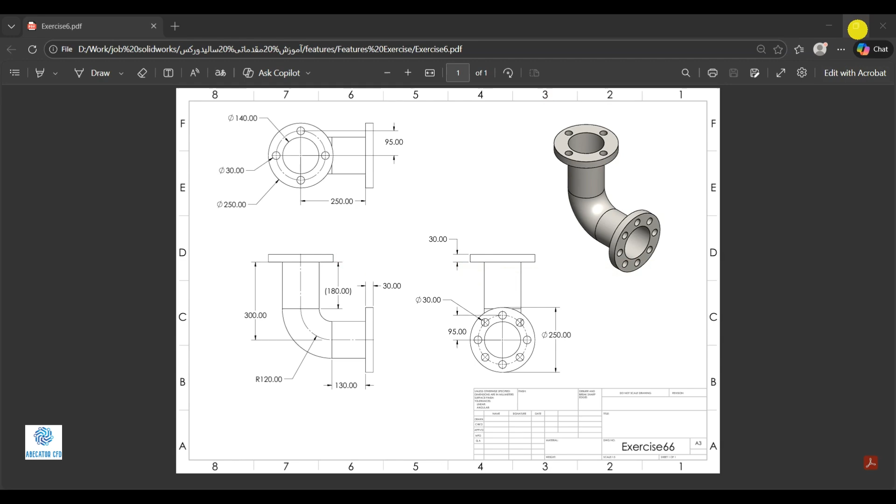We will build it using Swept Boss/Base with a circular profile. Let's get started. On the front plane, we create the sweep path sketch. Start a sketch and use lines and arcs to draw this path shape.

Draw the first line here and set its length to 130 millimeters. Now add a tangent arc, and set the arc radius to 120 millimeters.

The tangent arc tool automatically makes the arc tangent to the previous line. Now draw the next line and make it tangent to the arc. Set this line length to 180 millimeters.

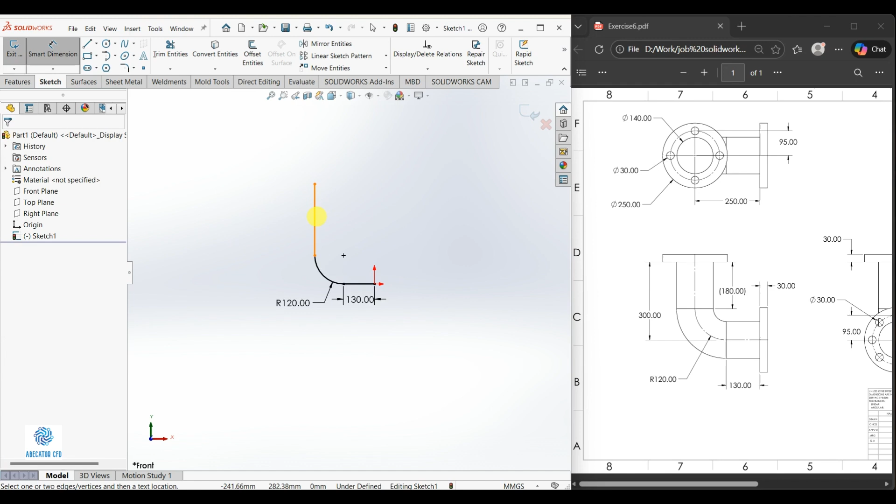Now select Swept Boss/Base, and use Circular Profile for the sweep. The pipe diameter is 140 millimeters, based on the drawing. Enter 140 millimeters for the profile diameter.

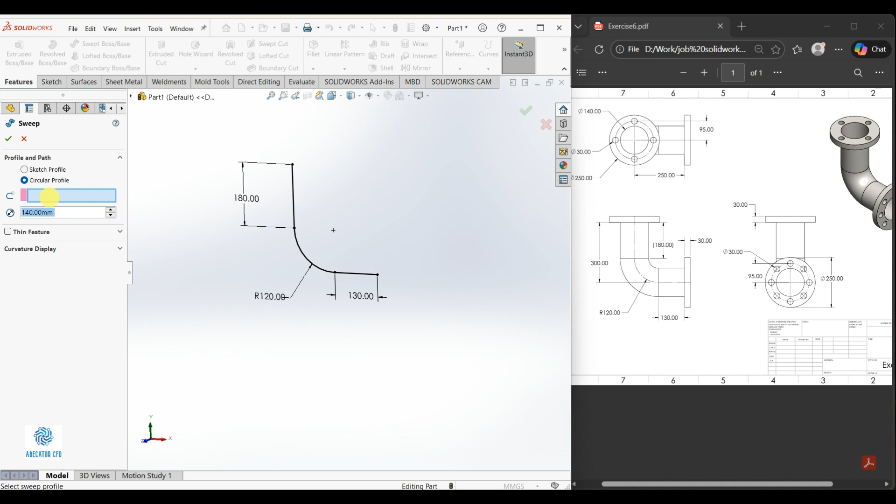Select the path, enable Thin Feature, and set the wall thickness to 1 millimeter. Click OK. The elbow is created successfully.

As you can see, it is a completely hollow elbow. If we use a section view, you can confirm the inside is hollow.

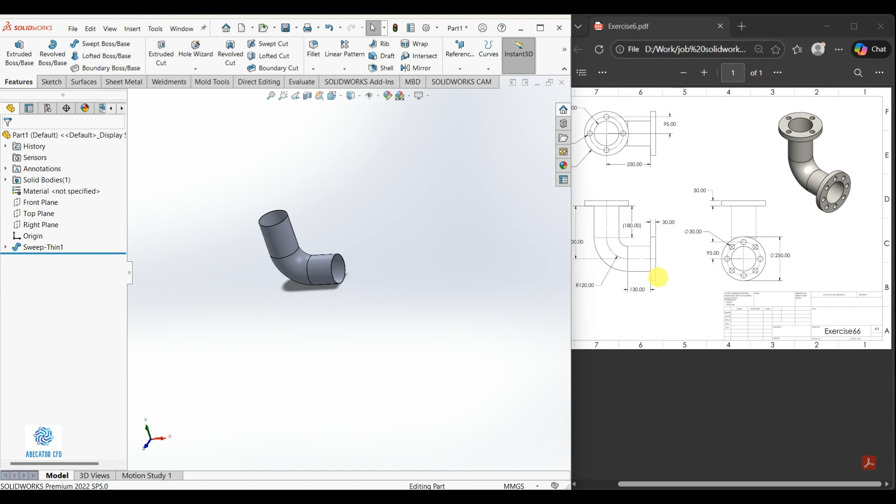Now let's create the end flanges on this side and the other side. Click this end face and start a new sketch. Draw an outer circle with this diameter, and set the outer diameter to 250 millimeters.

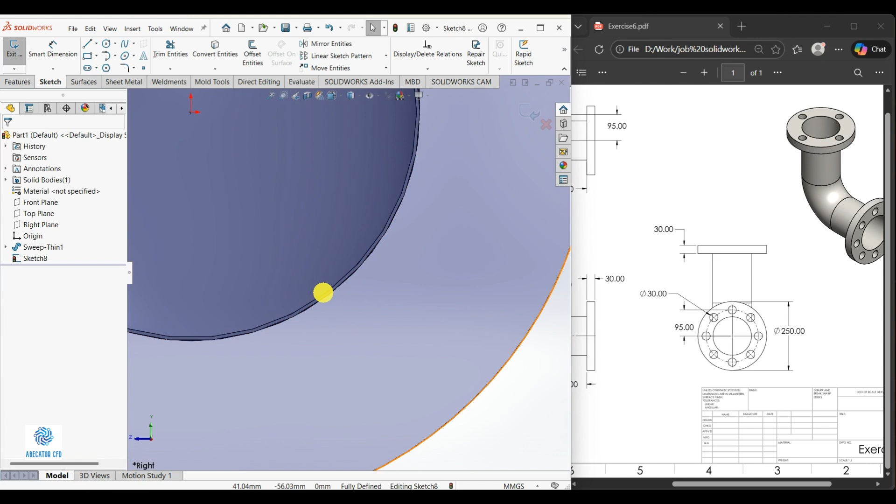Then click the inner edge and use Convert Entities, so the hole matches the pipe opening. Now extrude this flange by 30 millimeters.

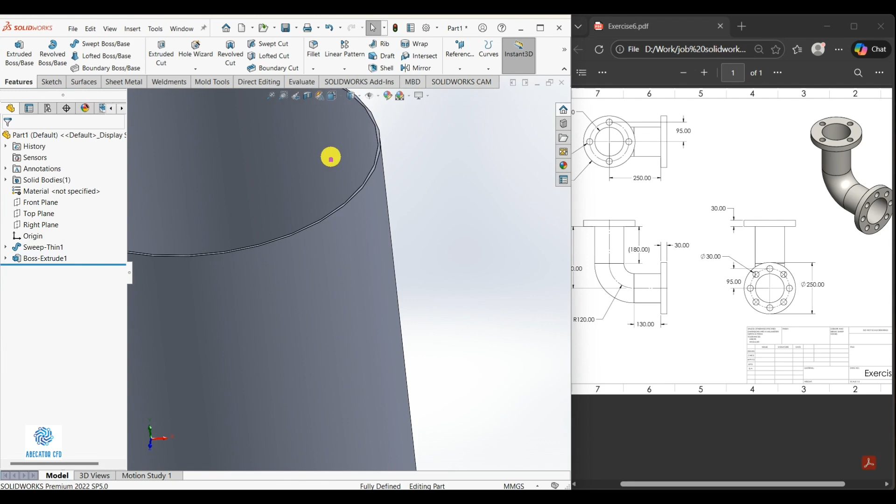Now let's create the flange on the other end too. This side also has a 250 millimeter diameter. Start another sketch, on this face.

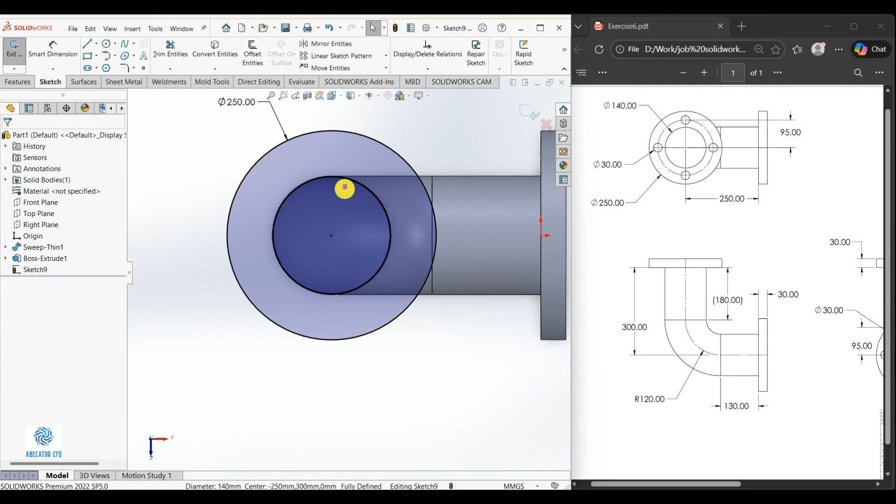Hover on the circle to reveal the center point. Draw the circle again and set it to 250 millimeters. Use Convert Entities again for the inner circle. Then extrude at 30 millimeters. Click OK. The second flange is done.

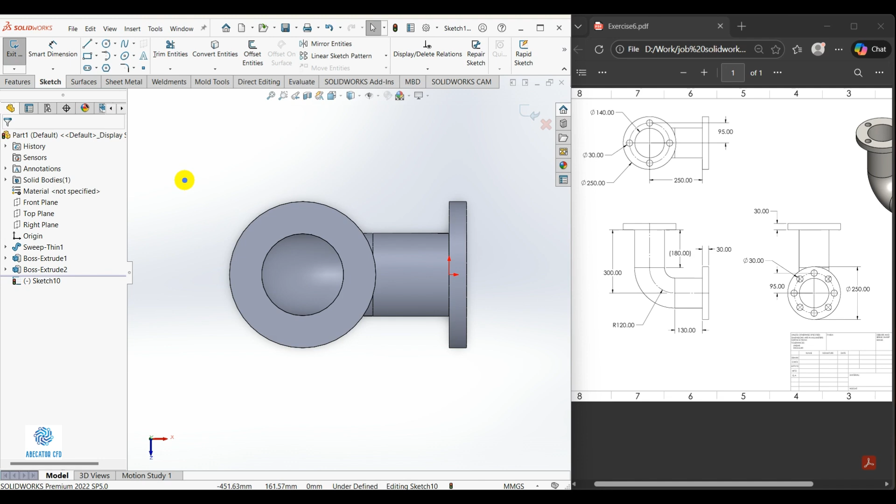Now let's create the bolt holes on these flanges using circular pattern. Start a sketch on this face. Draw a circle here, and create a center line through the middle as a reference. This center line gives us a clean center reference for dimensions.

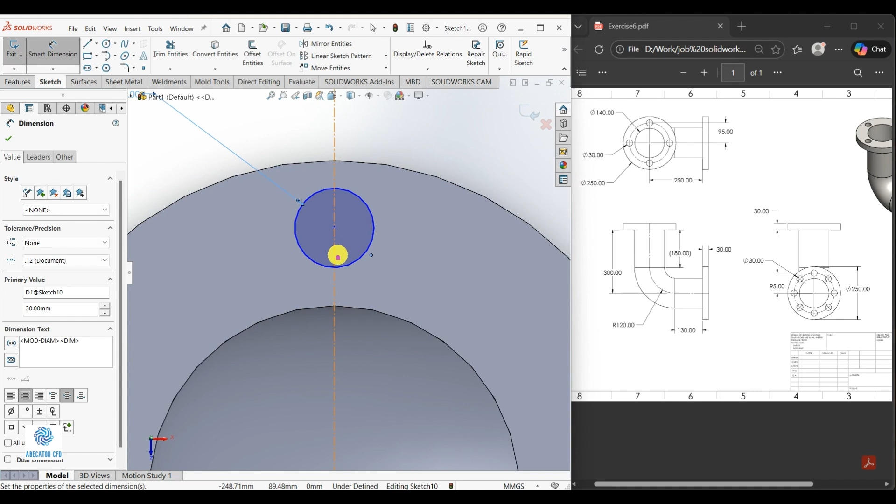Make the circle center coincident to the center line, then set the hole diameter to 30 millimeters. Now set the distance from the part center to this hole center, to 95 millimeters.

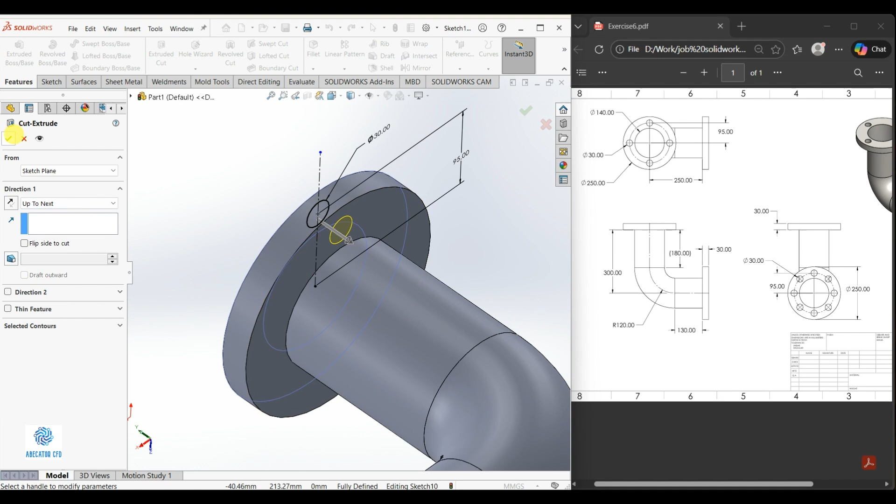Now use Extruded Cut to create the hole. Set the end condition to up to next, so it cuts exactly to the next face.

Now in Features, choose Circular Pattern. Select the Cut Extrude as the feature to pattern. For direction, select this circular edge. Set the number of instances to 8, then click OK.

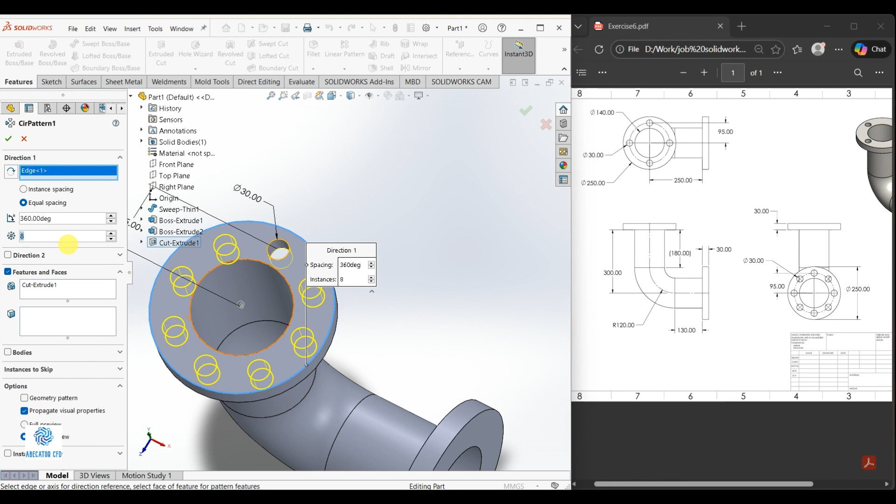Great, this side is done. Now let's create the holes on the other flange. Start a sketch on this face and draw another circle.

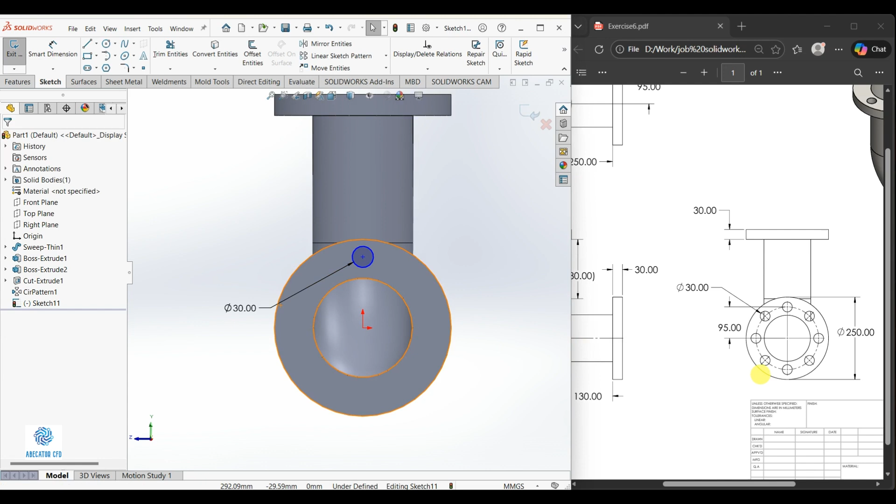Set the hole diameter to 30 millimeters. Set its distance from the origin to 95 millimeters, and add that dimension. Also add a vertical relation with the origin, so it stays centered.

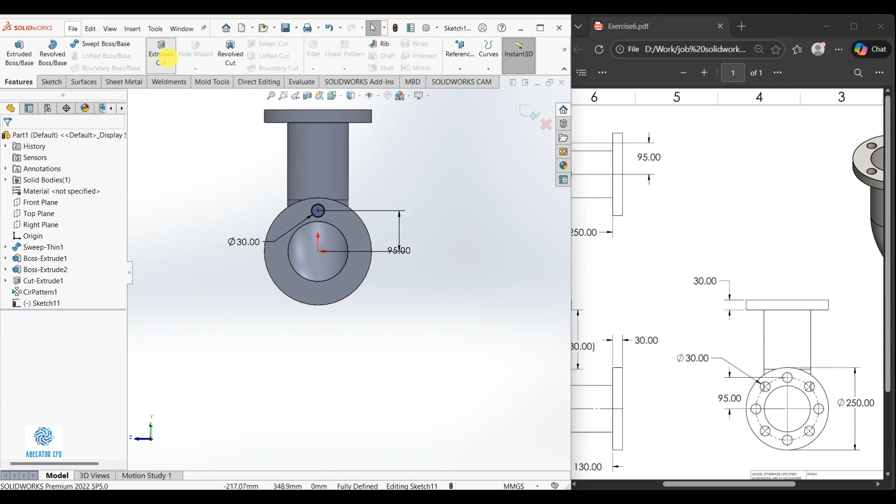Use Extruded Cut again, and set it to up to next. Then use circular pattern to copy this hole, setting the count to 8.

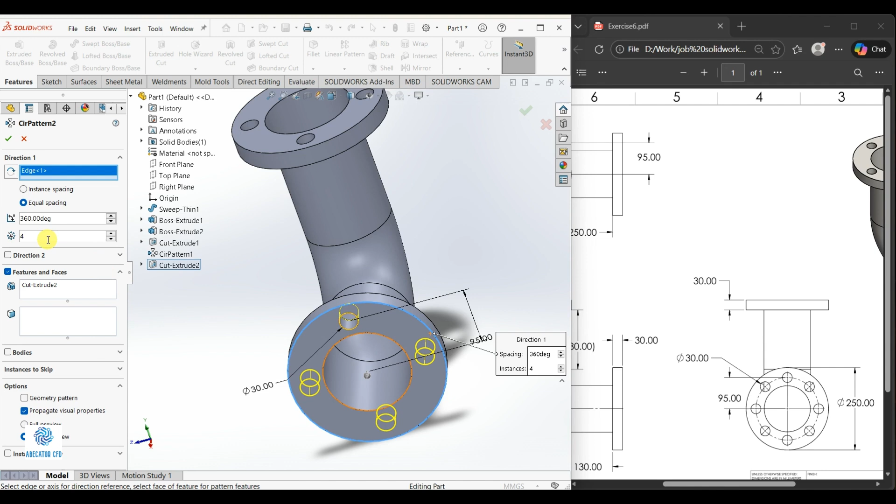In Features, select the cut feature you just created. For direction, select the circular edge. Then set the number of instances to 8. Click OK. Now this side is complete too.

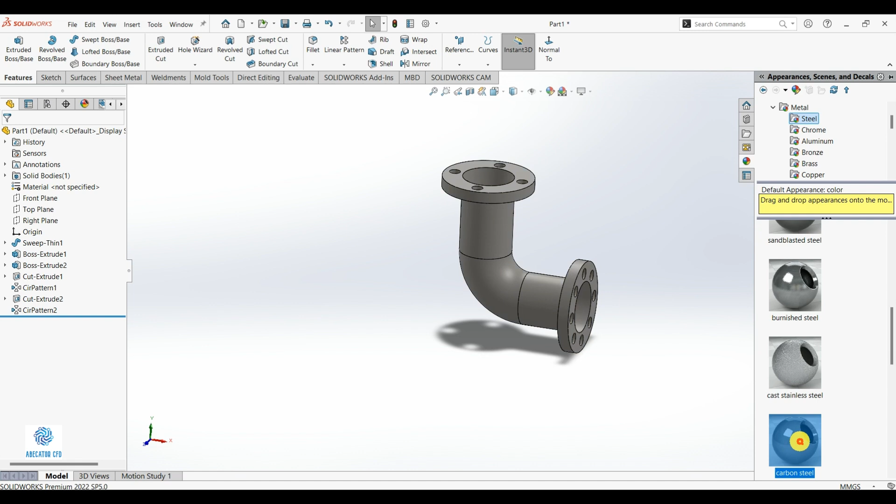The model is complete. Now let's give it a realistic material. Go to Appearances, then Metals, then Steel, and choose carbon steel for a more realistic look. Set the background to plain white and enable RealView graphics.

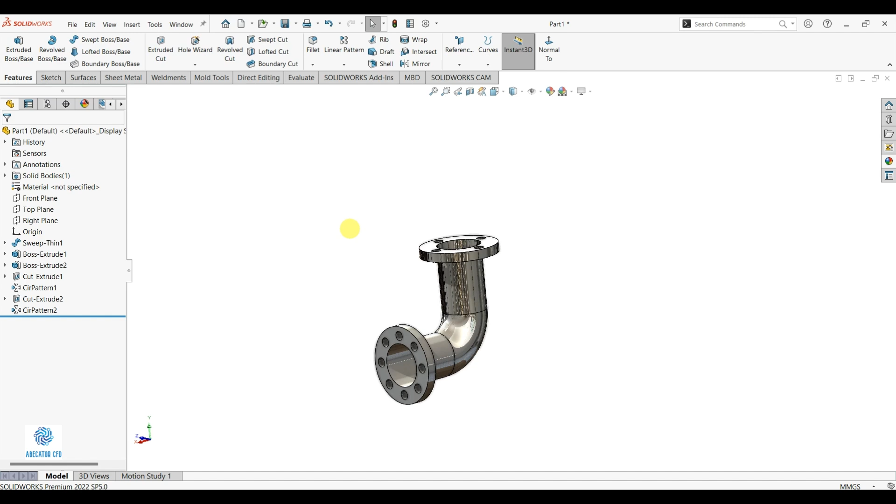Now let's also get a quick introduction to rendering. To render, go to SolidWorks add-ins. Enable PhotoView 360 first. If PhotoView 360 is not active, you need to turn it on.

Go to Tools, then scroll down and choose Add-ins. Find PhotoView 360 in the list, check it, and click OK. Now it becomes active.

Now go to the Render Tools tab. If you do not see it, right-click the tabs at the top, go to Tabs, and enable Render Tools.

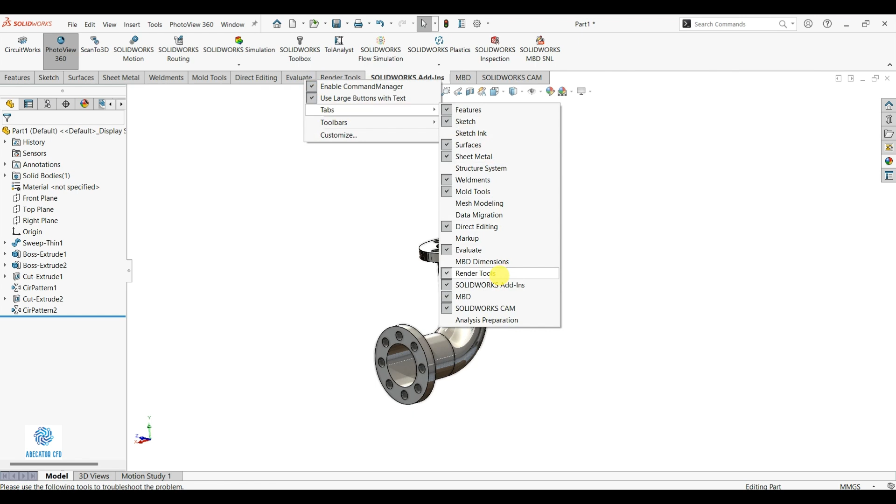Now click Final Render to create a simple render. This option controls the camera angle, but for now we will ignore it. Just click the Render button here.

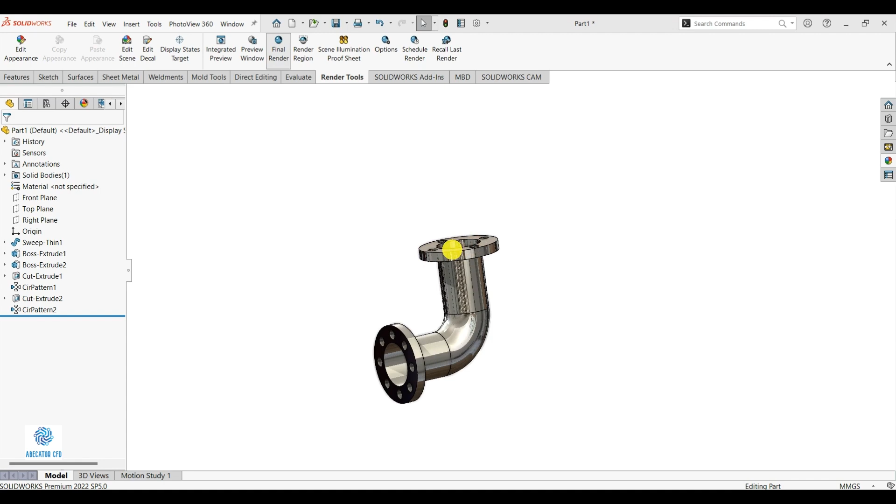Now wait for the rendering process to finish. It can take a little time. If your computer is faster, the render will finish quicker. Rendering has started, and you can see the progress in this area. Let's wait until the render completes.

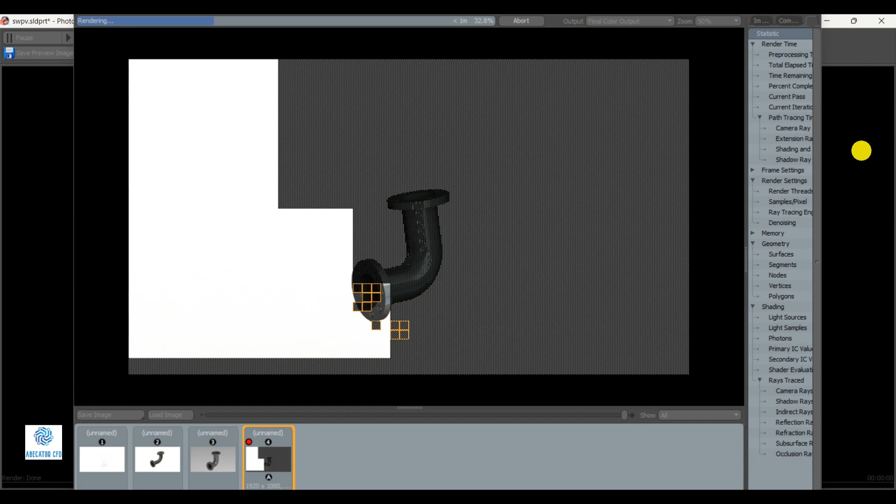Done. The render is finished, and the image looks much more realistic. You can save this image from here, choosing any folder path you want to save it there.